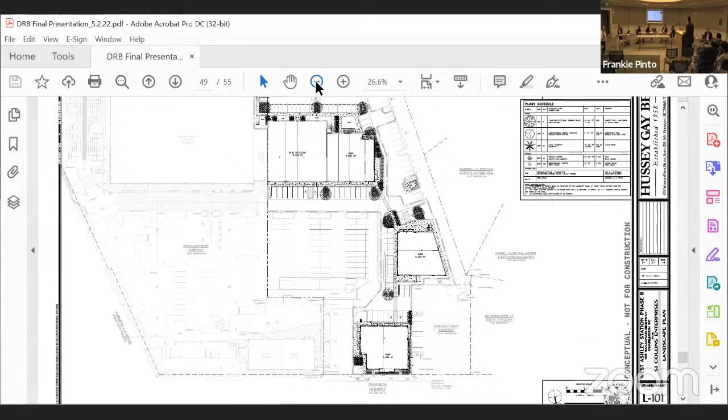We had more room between the property line there, and that particular corner of the building is not as visible as the 300 building, so I understand your comment. I haven't ever oriented a riser room in this manner, but knowing this is a four-sided building, we tried to deal with it as best we could. If we had enough room, we might have located it on the east side of the building, but there's just not enough room on the property line there, and the other side is the main entrance. You obviously can't put it on the front side, so you're really limited on where you can locate it.

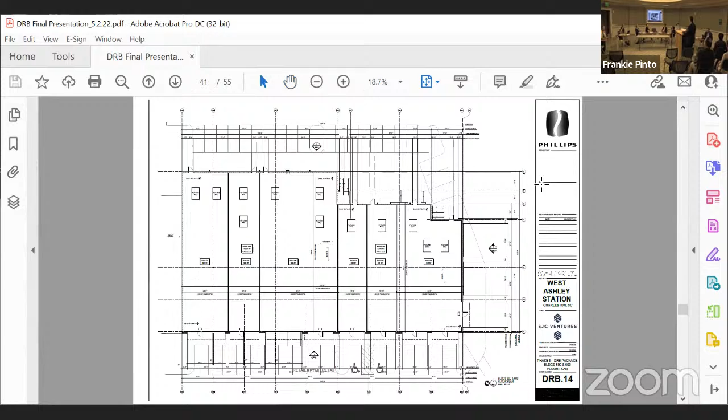Thank you. Any other questions from the board? The only question I had is, have y'all looked at any engagement on that side? I ask because my daughter plays tennis over there, and I know a lot of people walk from there. That's certainly something we can consider. There is a drainage ditch between the two areas, so we need to get creative, but we'd be willing to look at that and see if there's something that works for both the city and the community.

David, can you go to the overall plan, or just the plan of the inline building? The existing shops, 2001 square feet, that's there already, correct. Some of the plans show the new building set a little bit back, some show it in line, and the landscape plan shows it a little bit in front. Do you know exactly where? If we look at the site plan, that should be the most accurate. So right in line? Yes, sir.

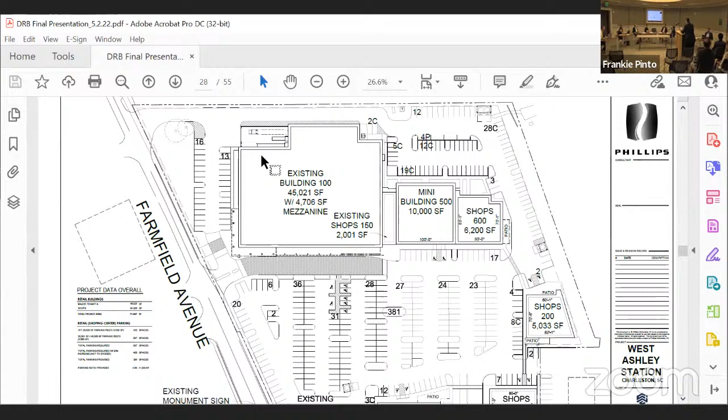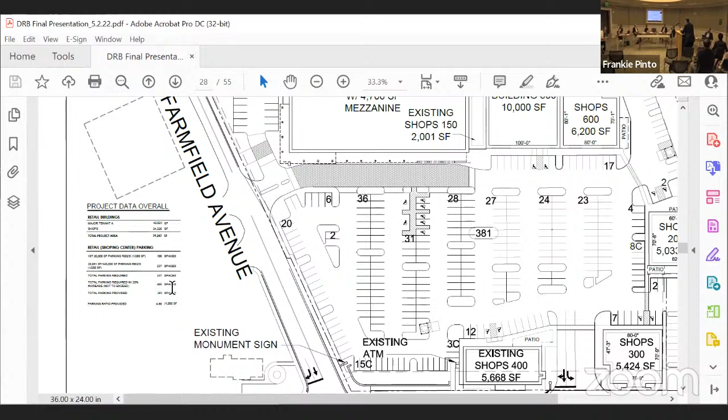Yep, and here I believe they were 44 over what zoning is asking. I think my trusty assistant just handed me the talking points I should have already had. David, what I'm showing here is total parking required 321 spaces and total parking provided 394, so that would put us 70 and change over.

Right, so 321 required, 394 provided. That's what I have here, although this looks like it was after we sent something to you, David. So let's go with your number. I have total parking required 337 and total provided 381. So around 50 plus or minus surplus. 44 - not good at math either.

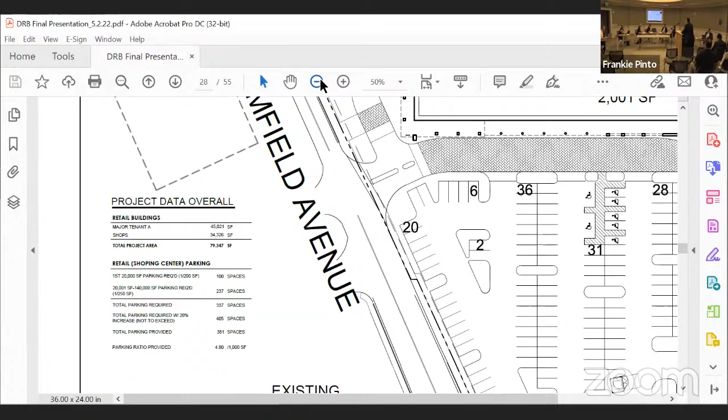How many do we have now? David, we probably have a slide that shows the demo plan that shows it. Yes sir, I'm sorry, I didn't catch that. May not, but I'm hoping. I don't remember what sheet it's on, it's hard to read unless I zoom in.

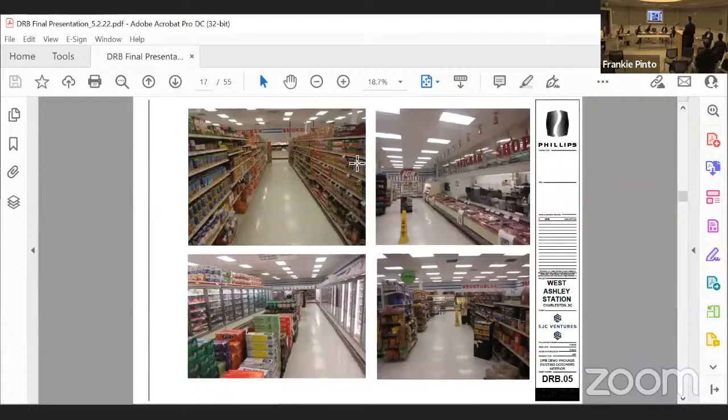I'm just curious, that parking lot is slammed all the time. Wait, does that show parking count? Go back. Oh, I'm sorry. Everybody parks there that goes to eat. Squeeze the line, squeeze the line.

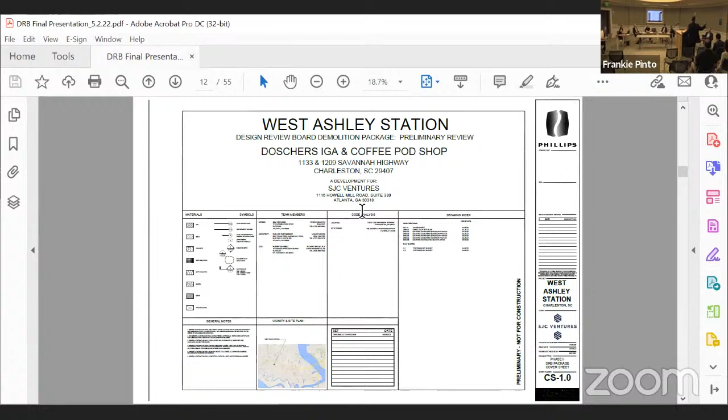Wasn't there a shared parking agreement with Swig and Swine and the center? There is a shared parking arrangement with Swig and Swine. We owe them, I remember that. It's 18 spaces - they're not dedicated spaces, but on the plan, on the east side of that drawing in the vertical parking that goes north to south, we have 18 spaces listed as Swig and Swine parking allowed, it's the waiver. So that's 18 in addition to what's required by zoning? No, that's included - that's shared space.

Any additional questions from the board? David, staff comments please.

Staff observation: the height, scale and massing of buildings are keeping with the existing phase one building. The structure fits in nicely with the material palette used for phase one being matched in this proposal. My staff comment starts with number 2, I apologize - restudy the front facade of buildings 500 and 600. We like the design direction, but feel the rhythm of the ups and downs...

Let me go to that elevation please. We like the design direction, but feel the rhythm of the ups and downs of the plaster panel system could be improved upon. The plaster panel system just to the west of the building hyphen seems to be in conflict with the hyphen, and we question why it drops down further than all the other sections of plaster panel.

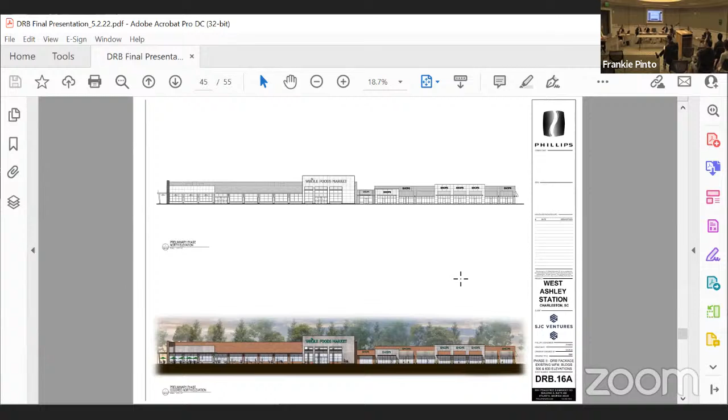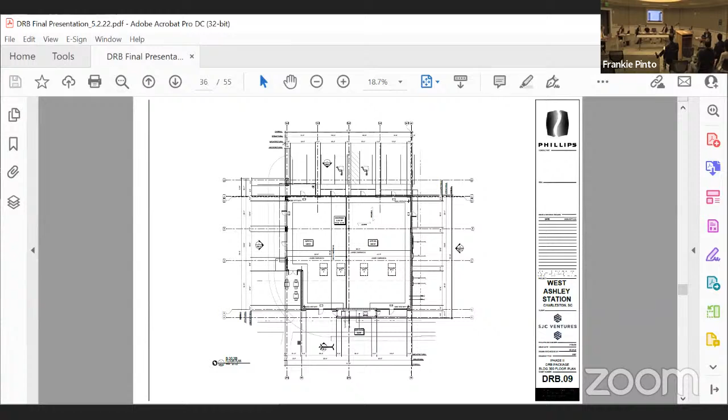Staff comment number 7: the bottom elevation is the north elevation facing Savannah Highway. You can see the panel in the middle, and if you look at the plan, you can see where this projects out and the electric panels are behind that. Staff is recommending it be moved from the side facing Savannah Highway to the west elevation where you already have some utilities. I don't think it would be quite as visible there, though it's covered by a panel, you'd still be able to see it. As you approach from the north, east, or west, you'd still see the utilities projecting out of the building, so we suggest moving it to the west facade instead.

With that, staff does recommend conceptual approval with the conditions noted.

Thanks, David. Mr. Thomas, do you have anything you want to clarify from public comments or staff comments? Couple things.

There was a comment from the public about an issue with the ADA wall. I'll look into that and see if we can do something to better accommodate that problem.

The only other thing I would say is certainly we'd like to achieve conceptual approval. We'll work with David to address any staff comments and come up with something that's mutually agreeable to everybody.

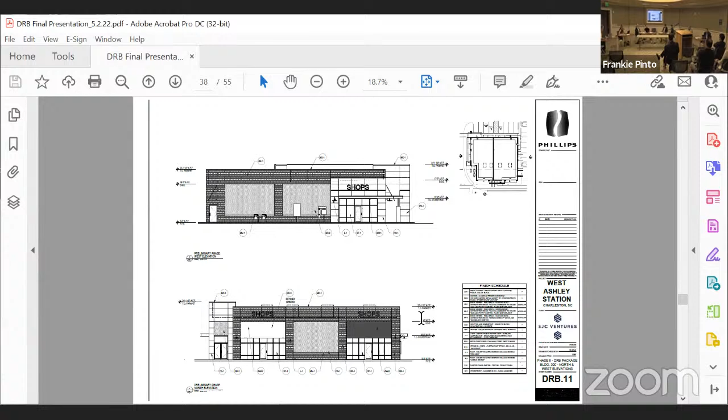Thank you. We are now in board discussion. Give a motion. For me to understand a little bit better, comment 6 — David, can you look at the site plan? I didn't quite follow exactly what it meant.

Landscape plan — is that an unnamed street? Let me zoom in, hold on, where is that? I've got Google Earth up. Showing — Google Earth shows are great. I'm looking at it right now too. Sure.

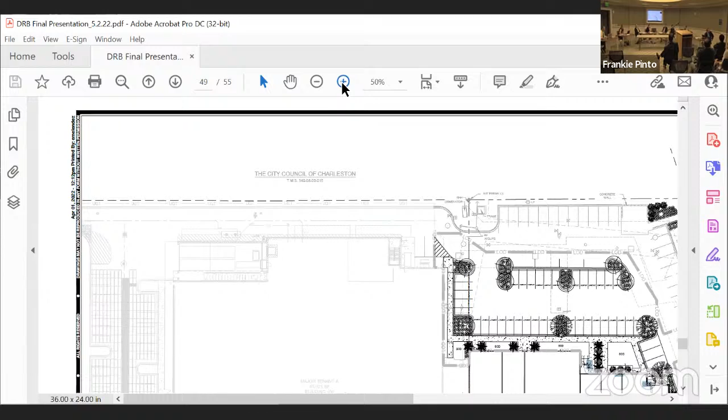So this is the corner where they were adding landscape, I think it was requested by the neighbors. Yes, possibly — this is the end of the street. Looking at street view, I saw some already fairly new looking landscape that was up in this corner. So you're recommending they pay attention to what had recently been planted and incorporate it into their plan. Okay — that main street is just pedestrian, I think, and it's in pretty bad shape.

From a civil engineering standpoint, just asking — it does provide a tertiary vehicular access from Parkwood Estates, Parkwood Heights, and that whole area over there. Is there a good reason not to maintain the opening of that street? For vehicular access, it depends on who owns it — I don't know who owns the right of way or if there's access to it. From a transportation planning standpoint, any cross connections are looked upon favorably unless there are objections from the neighborhood, and again, it depends on whoever owns the right of way.

Yes, I can speak to that. I don't know who owns it — I can certainly do some research and find out quickly, but that was closed before we ever started our development. While I think it would be convenient for some, there are also two houses on both sides of that. If I was one of those homeowners, I would despise having that access. If I lived in that subdivision, while it would be convenient, I would feel apprehensive about having that access because it could potentially cause more traffic through a residential area.

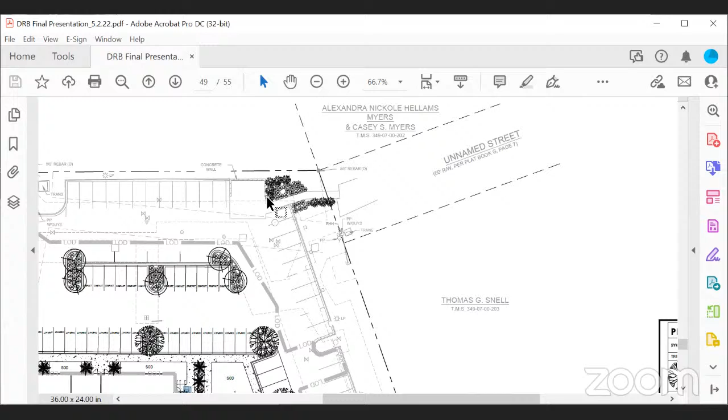I guess, in addition to that comment about finding out more about this unnamed street, making this connection a little bit more, not terminating in a dumpster, is probably a good step forward. Can you zoom out to the whole site plan?

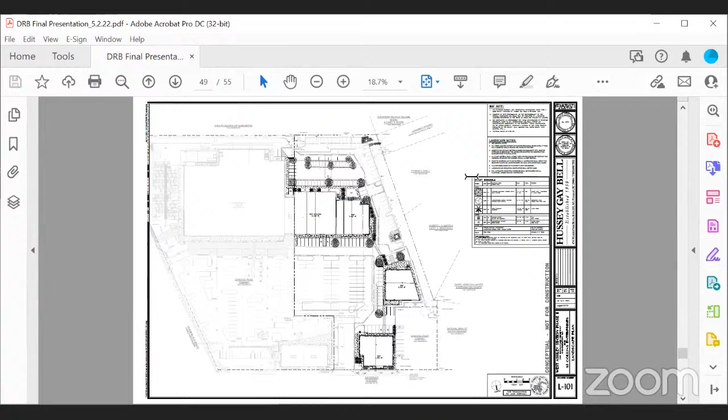We can kind of start here, from a landscape point of view. The canopy trees are all very... there are not many of them, but they are monoculture. They all look like bald cypress. Might want to look at some variety.

That same comment could apply across this whole plant list. I would look at the location of certain plants that are on here. I won't go into that until we get to preliminary, but especially around pedestrian areas.

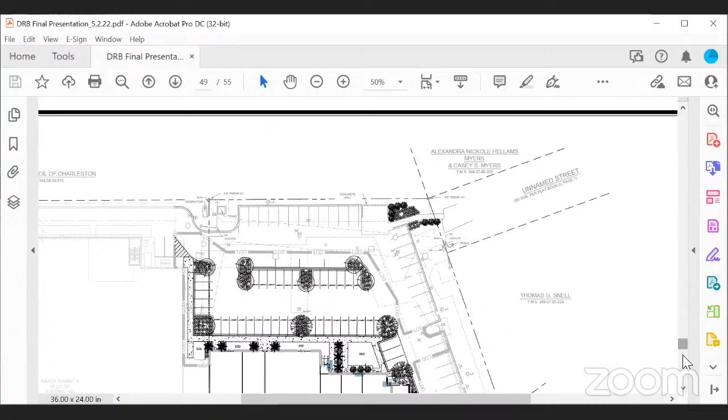This patio area, I think there are a lot of instances of concrete that could be broken up, and you could incorporate a palm, a canopy tree, something, if you're intending those to be use areas. It would be nice to have something to lower the heat gain out there, I think.

I do think this building, especially with the amount of parking you're over, could potentially set back just a little bit, and then get you some verticality on the front of this building. There's no overhead power out there, so it would be nice to get something between this building and the street, or the building and the pedestrian area, that makes that a more comfortable walk.

Incorporation of different paving materials, I think, would be good. Once again, I would focus more on the backs of these buildings, especially when we're talking about bringing pedestrians in from the back. It would really be very tragic to bring them into a delivery area.

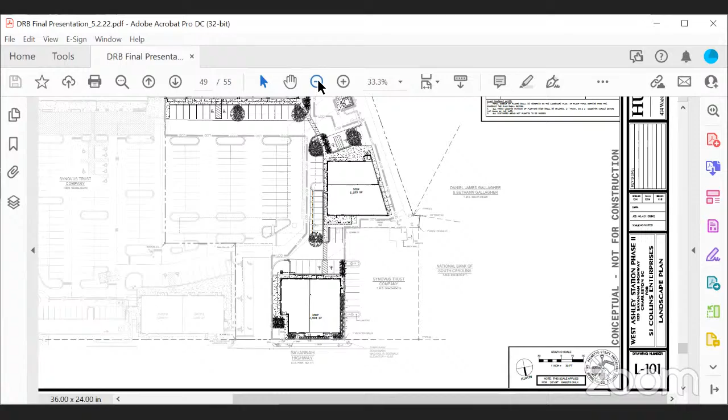And kind of, yeah, we're doing a connection to what? So that's just a thought in mind, looking at the site, I guess.

I have two other thoughts while we're on the landscape plan that I think could help. One is piggybacking on what Andy said — I understand the city wants the buildings up close to the street, and that is generally a good move. It creates more presence, a safer feeling place, but there's an in-between where it's addressing the street while set far back enough to create a comfortable space for people.

So I don't think we're suggesting going against what the city originally asked for, just adding a little more cushion so it can welcome pedestrians instead of having it jammed right up against the sidewalk and street, since it's such a high speed, busy street. You need a bit more space for people to feel comfortable — just nudging it back enough to make some space.

The other comment is somewhat minor, but it's why I asked about the parking lot — I noticed maybe part of it has no proposed landscaping. I didn't know if you were keeping it, but if it's going to be re-landscaped, I'd request that these islands be pushed back. I know you can't have more than 10 or 12 in a row, but instead of doing 10 and then 2, you could do 6 and 6, spreading the canopy trees more evenly through the asphalt, creating a more welcoming and comfortable place and helping break up the hardscape.

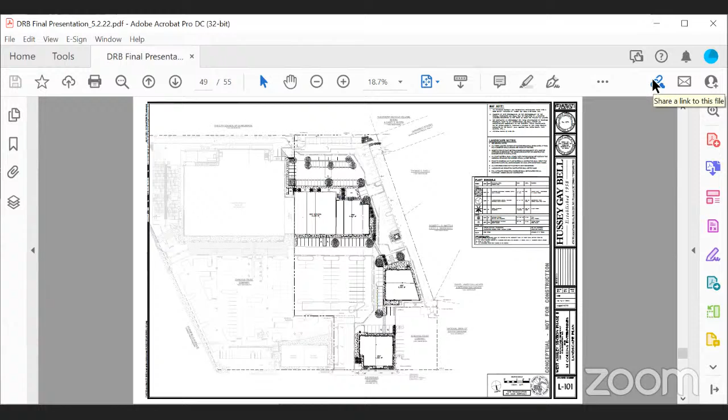Exactly, yeah, that's what jumped out at me when I first looked at the site plan. That's all I have. Back to the overall elevation.

I think the hyphen needs to read as a hyphen. It's jumbled, especially since it's being shown proud of the new. It should probably read as two buildings connected by this, even though it's existing, it can still be articulated as a hyphen. It might mean limiting the new building to a single.

You have this more prominent fiber—it's not fiber cement, it's plaster, I guess. What is it? A tectum facade—that might have to be more prominent and central to make it read as a second but still subservient building, and then the hyphen can be a secondary language there.

I was curious what the landscape people thought about that—even review, because they have this nice area in front of Whole Foods. It's this nice kind of, I think it's curbless, right? And it's this paver area, but it's a different condition in front of the new building because you have the parking in front.

But I'm wondering if there's still some way of dragging a bit of that niceness—I think it needs to bring it across. Yeah, I agree. I'd like to see you get rid of the parking and extend it out the same way that Whole Foods is. I mean, you show all these people sitting out in front of Whole Foods. It'd be nice to show it at 500 and 600.

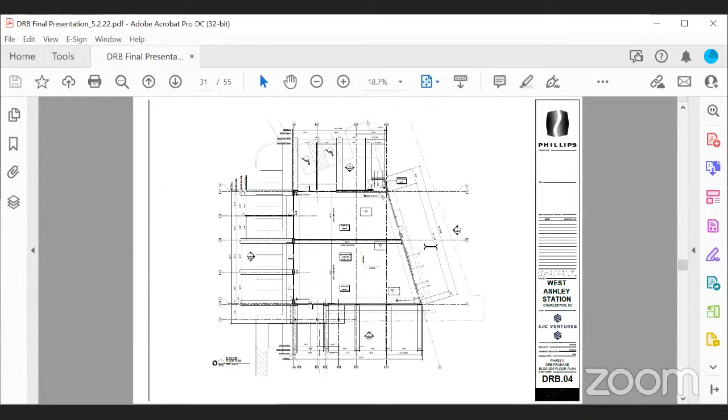Let's see, I think it's building 200. It shows concrete block painted back next to the electrical and gas meters. I would ask those buildings—I think you got it on 300—but have it covered in either the brick veneer or another material.

And I think as a board, we've usually asked to cover or screen a lot of those utility areas. I think you can see it in like the elevation on the back where there's a big gang electrical panel run, gas meters—some kind of screening or something on the west elevation of building 200. Right.

But I do agree with staff comments that the pavers should be continued in front of building 500 and 600. And if we're plus 44 spots, I mean, it'd be really nice to give something back to West Ashley folks in front of those shops and having tables, seats, whatever. You could do some—I mean, it wouldn't gain you back all of them, but you could do some parallel parking. Yeah, or some angled or something.

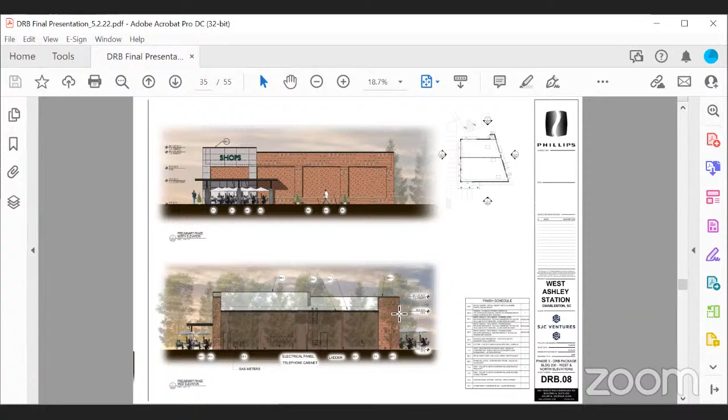I think you'll run into a fire problem with a one-way situation right there in front of the door. But I think that—study, I guess the best way to say is study a way to extend.

I think getting the pavers over there is good, and even if you were to incorporate that head-in parking, it could become something else. Some of these have started out as parking and then become patio areas, just see what your traffic patterns are like.

But or parallel parking, it's a type of parking style from a bygone era, especially with these sorts of stores. I think studying it is a great way to word it. This conceptual still gives us the right to review it again at preliminary.

It'd be nice to move that front facade, building 300. I get, I'm sure the sprinkler room's there because the fire line's right there on the street, so it's very convenient, I'm guessing.

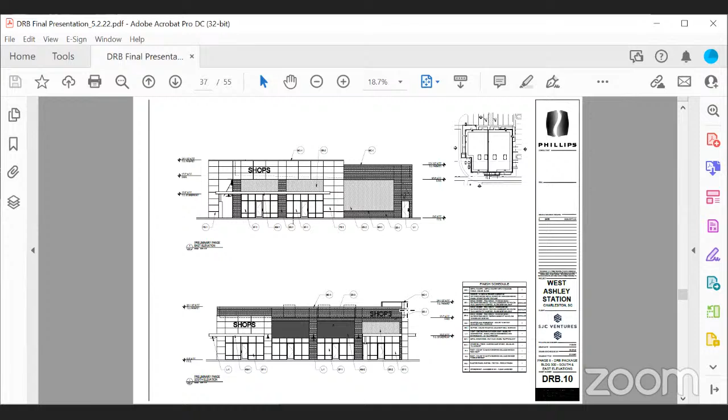Maybe instead of making it a feature, recess it in the building. These two utility doors right there on the front pedestrian path, they're going to be utility doors, there's no way around it. Or investigate putting it on the northern side of that location, more hidden, not made into an architectural feature.

Back to the building. I can appreciate the fact that there's nothing contextual to draw upon, and I know the struggles you go through in this regard. But I think what's missing is a more cohesive relationship regarding not only the vehicular parking, but the manner in which the pedestrian begins to navigate, maybe even more so a little bit of a sense of a village, which is a collection of the buildings you're having here.

One of the components that helps Whole Foods design a great deal is the canopy. I think it was mentioned before, and I'm assuming when you're talking about the seating plaza in the front, it's the whole ambiance of the shade and the canopy and everything. It seems that it's voided as far as the balance of the structures.

In one way, as Lucas was suggesting, possibly consider reinforcing that hyphen, look at building 500 and provide a canopy feature. Granted, it would be getting rid of those cars in the front. Whereas I appreciate greatly the economics of the parking aspect, there is an absence of unity in a three-dimensional manner that's happening here. It seems like it would be a wonderful opportunity to reintroduce that canopy again.

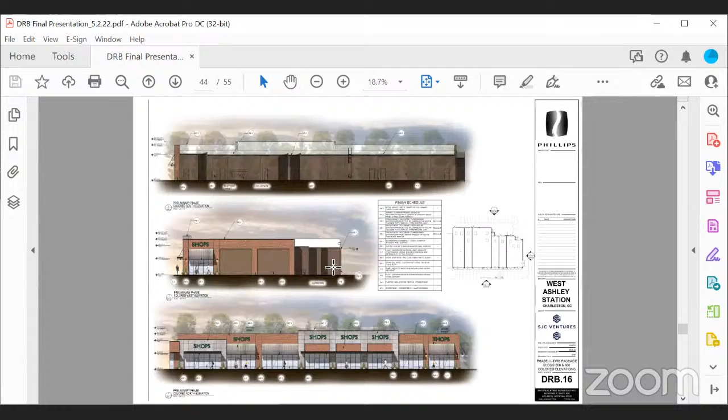The other thing on the elevation, look at that overall elevation, it kind of just fades out toward the end. I'm wanting something to happen here that kind of terminates this line of the elevation, and possibly just the placement of where those gray panels are might be a help in some fashion.

And the length there of facade, to almost treat it as a microcosm of a traditional Main Street. You do, given the pedestrian experience is treated properly.

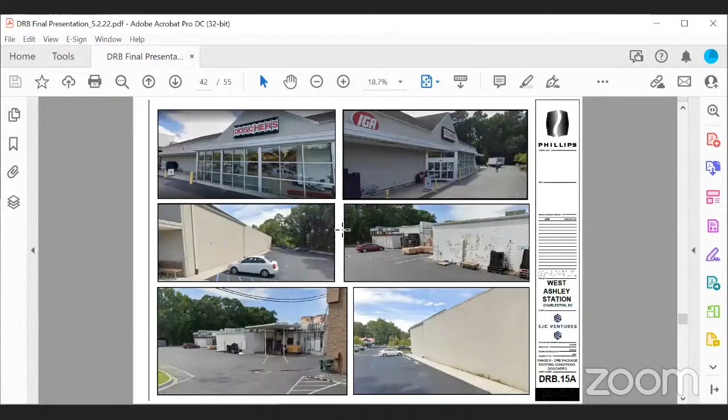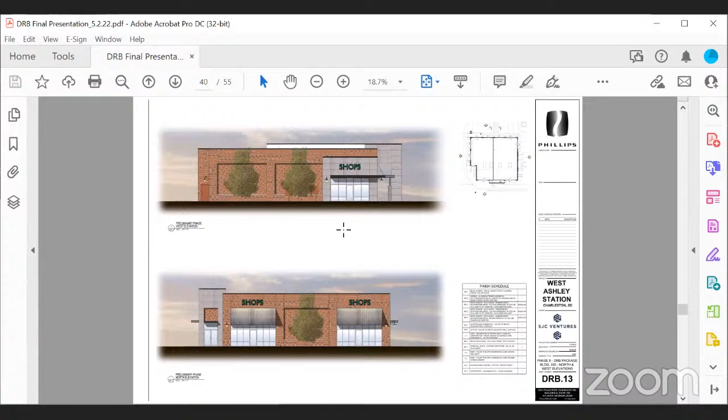The other issue, I think it's been said before, 200 and 300, particularly on 300, I really would like more transparency as opposed to putting the riser on the Savannah Highway street facade. There's no clever way to do this, and there's just the idea again that there would be a better location for that riser.

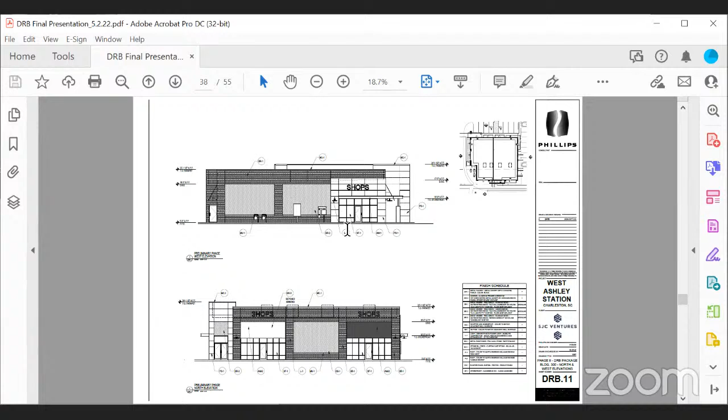I struggle with this, I get it, but to me it seems like a very logical extension of the Whole Foods. The whole thing's very logical. You look at the facade and it's like, yeah, A equals A. The part that I really struggle with is the placemaking, and I think all the things we're talking about is really placemaking.

Canopies make sense at Whole Foods, they provide dining. We have patios listed on the site plan, but the architecture doesn't really respond to it.

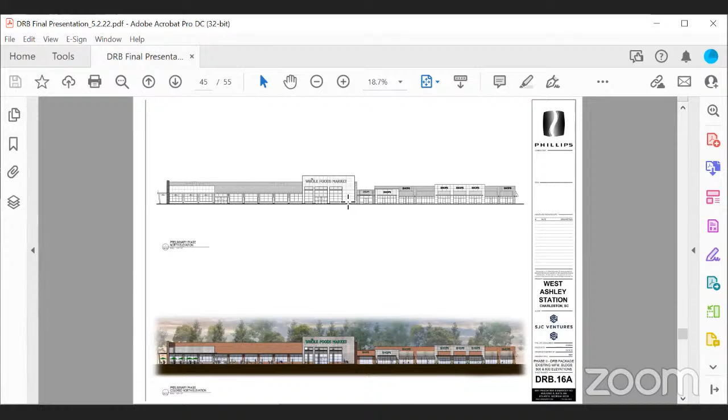Building, whatever it was, back, I think it's 300. It's laughable, there's three chairs or three tables on the corner. Who wants to sit on that corner? It's like 5 feet from the intersection.

So I just struggle with this idea of this being a place. Yes, it will be businesses, and yes, it will be tenants, and yes, it will be successful because it's building on something that's already there. I know it can be more. The things we're talking about, the connectivity, the architecture responding to the activities would be helpful.

And bicycles and getting lost, like that road to nowhere or whatever it is up in the right corner. It sounds like a cool opportunity, but it is so underthought right now. It's just like, I got to do something, so I'm going to do something up there.

But the back, it faces the back of the architecture. Like the landscaping would suggest, as you pointed out, that there's something there, like landscaping and green and grass. But you look at the elevations and it's painted block, roof access ladder, and utilities.

I struggle with where are people coming from. I think we got it from a car, understood. But where are the other connection points that can inform the architecture? The end of that line, 500, 600, it can draw people or give somebody a destination to go to. But right now it's the back of the building.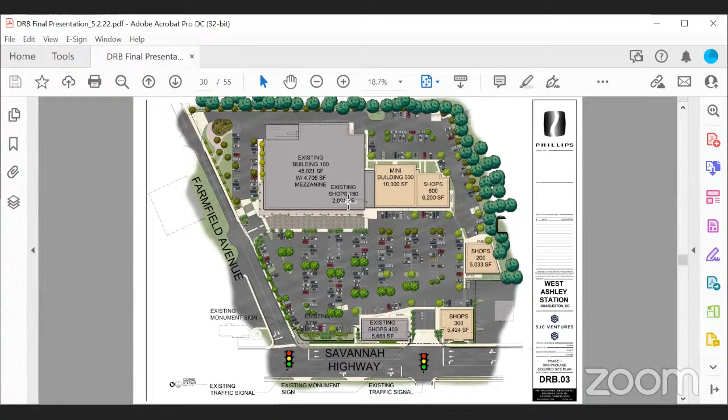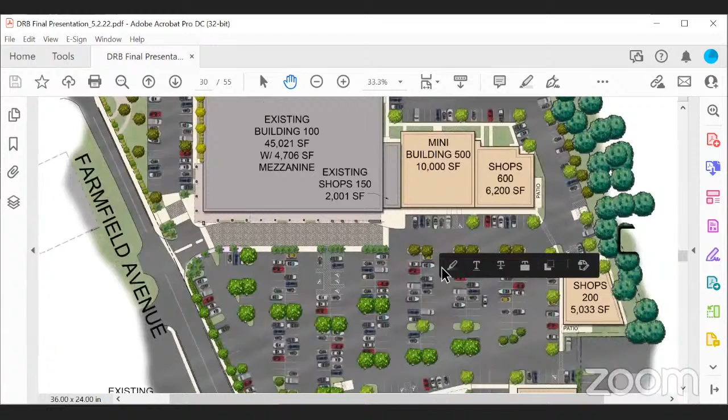By looking at it, it's not pointed, it's not labeled. If it is, I couldn't find it. You probably could shed light on that. Right, yeah, but you have.

Okay, well, I'm just going to take a shot and I need some help in this. I would move for deferral with staff comments 2 through 7, with board comments.

Provide as much transparency in the buildings, new buildings as possible. Say that again, Dino, sorry. Provide as much transparency in the new buildings.

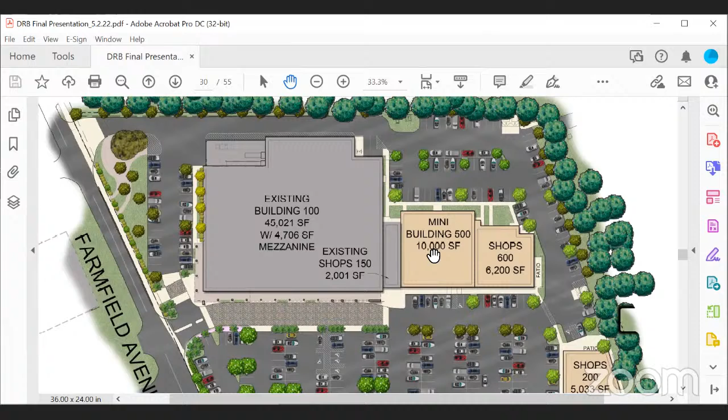Develop a stronger scheme that incorporates the pedestrian experience, embracing more of a village concept. Stop me if I'm going wrong. Landscape and architecture. Yeah, landscape and architecture.

Re-examine the access from Parkwood Estates off Sunset Drive. Let's say the unknown right-of-way at this point, but off of Bohicket Road. Let's get that on the record. We are on record. I think that just say incorporate that access into the overall planning.

Examine the possibility of strengthening the hyphen. Say that one again. Strengthen the hyphen by possibly incorporating a similar canopy as existing on Whole Foods.